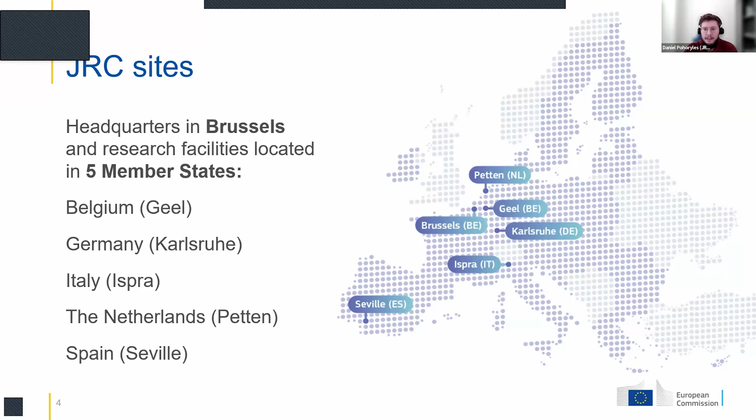The JRC has multiple sites. We are in ISPRA, which is the site in Italy. The headquarters are in Brussels, as for most of the European Commission. We also have other sites in Petten in the Netherlands, in Geel in Belgium, in Karlsruhe in Germany, and in Seville in Spain. At our site in ISPRA, we are home to the European Laboratory for Structural Assessment, ELSA.

Our laboratory is actually two different laboratories. It's a research infrastructure used to test safe and secure buildings. On the one hand we have the HOPLab, which is a lab for testing materials under high impact loading. On the other hand, the laboratory I'm going to talk about much more today is the reaction wall, which is a large scale facility in which we can test full scale buildings to earthquake loading.

We provide open access to this JRC infrastructure, so there's a possibility for universities or companies to come and do tests at our laboratory. We also provide training to researchers across Europe, so feel free to inquire when we do our trainings. And we provide transnational access through the Horizon Europe ERIES project - I'll show you an example of one of these projects today. We also have projects that are inside of the JRC, and I'll give some examples of these too.

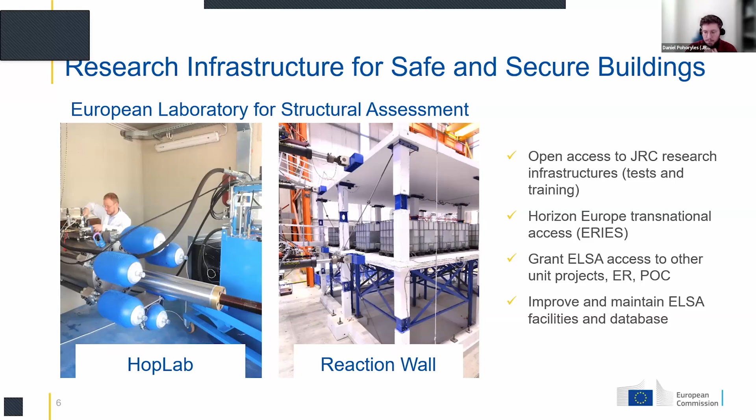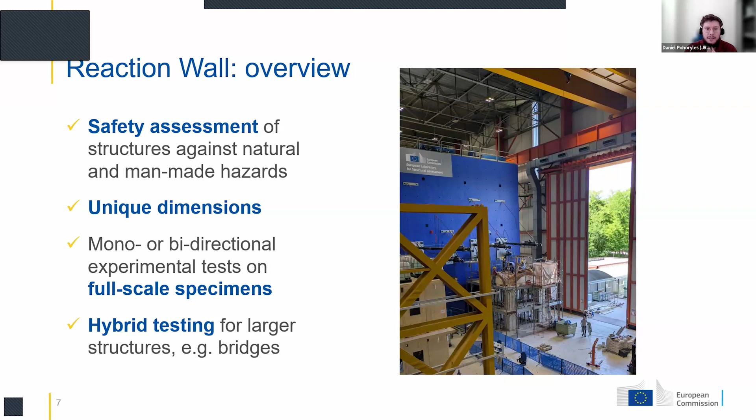Our reaction wall facility, which you can see in this nice picture, is a very specific and special facility in Europe. It's the largest reaction wall facility in Europe, the second largest in the world. We can carry out safety assessment of full-scale buildings. It has unique dimensions - you can see here on the technical side, it's a 16-meter tall strong wall together with a 4.2 meter deep strong floor.

We have capacity to test on two sides of the wall, so we can carry out experiments on multiple buildings in the same time frame. We can carry out seismic testing in one direction or in two directions, and we can also carry out hybrid testing for larger structures.

For example, when there are bridges, we can test big elements of a bridge but simulate the rest of it. Also for buildings, we can test a part of a building but simulate the rest through numerical modeling. So we have a lot of expertise on that.

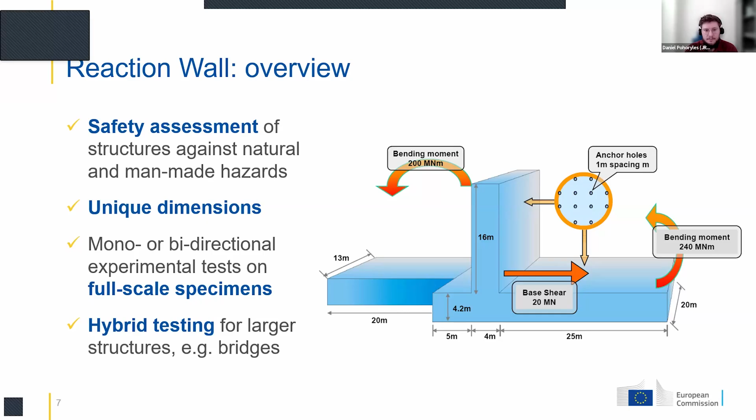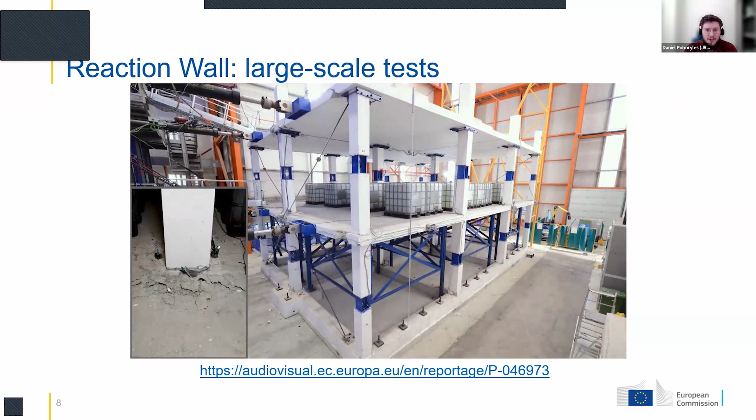Here you can see a bit of our lab in action. When a test starts, we have to first move the building inside the lab into the right position. And here you see an accelerated test. Our hybrid testing, or pseudodynamic testing as it's called, is actually a slowed down version of an earthquake. We can reproduce the dynamic forces through our numerical models and then test it.

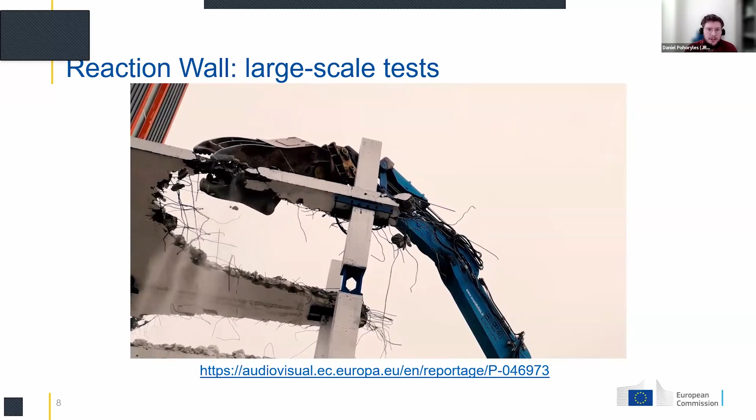And we go through the whole project cycle. At the end, we also demolish the building and look a bit at construction and demolition waste at the end of the project life cycle. So we really look at the whole project life cycle.

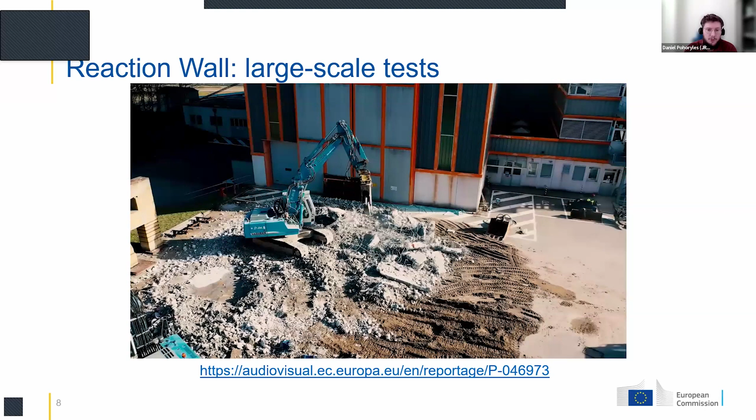We do this because a lot of the pre-normative testing for the Eurocodes, for instance, is done here. A lot of the research that goes into construction and demolition waste regulations is done here. So we really try to influence policymaking through our scientific results.

Now to get to the more pressing topic of the presentation, combined and integrated retrofitting technologies. I'm going to start with a brief introduction of the motivation and background. I'm sure most of you are familiar with this already if you're following this series of lectures.

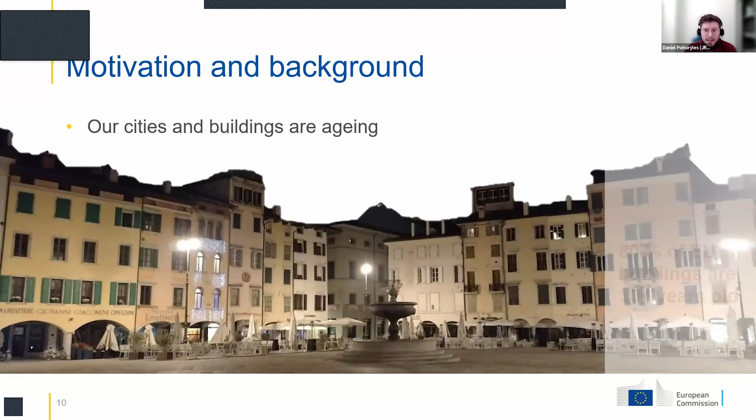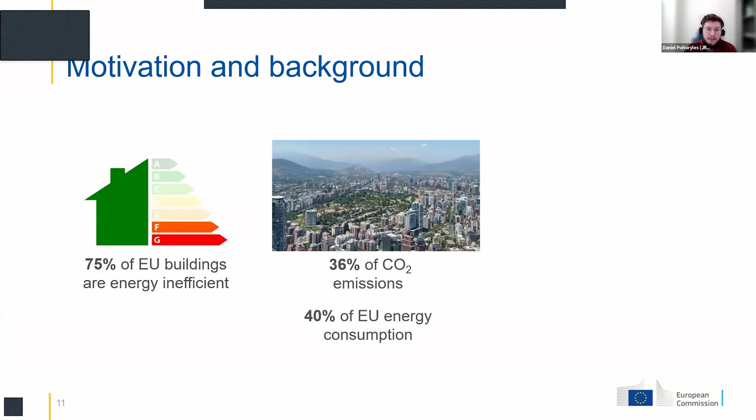As we all know, our cities and buildings in Europe are aging, and about 80% of the EU building stock is over 30 years old. This means that many of our buildings, about three-quarters, are deemed energy inefficient. The construction and building sector is responsible for a large proportion of CO2 emissions and up to 40% of EU energy consumption.

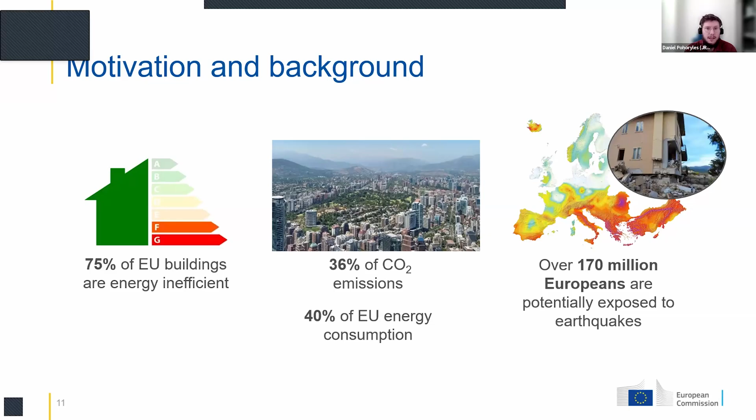At the same time, over 170 million Europeans are potentially exposed to earthquake hazard, which very often has catastrophic consequences if the buildings are not adequately designed or retrofitted.

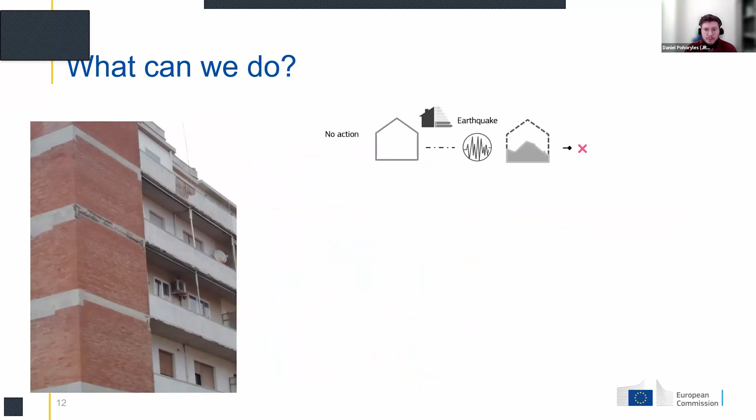So what we can do for these buildings is either take no action, which obviously leads to bad energy performance and potential losses during an earthquake. Or we can, as has been done a lot recently, focus on the energy side and do energy renovation. However, if you're in an earthquake-prone zone, this alone will not help, and you will actually lose the investment you made into the energy renovation.

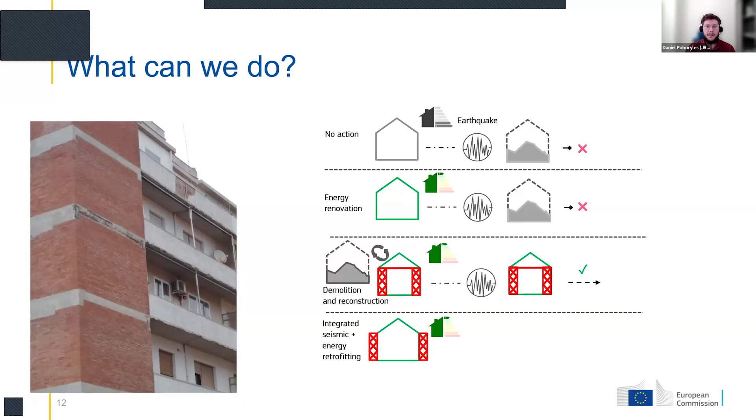So instead we are trying to promote actions that ensure the building is safe and energy efficient at the same time. This can be done either through demolition and reconstruction of a new building to the highest standards, which gives good energy efficiency and safety and may be more sustainable from a life cycle analysis perspective, or through integrated seismic and energy retrofitting, ensuring good energy efficiency and that the building withstands earthquakes in the zone.

So what we did at the JRC, within the pilot project we built a few years ago, is a multi-criteria assessment of combined retrofitting options. The idea of combined retrofitting is to ensure sustainability and seismic safety.

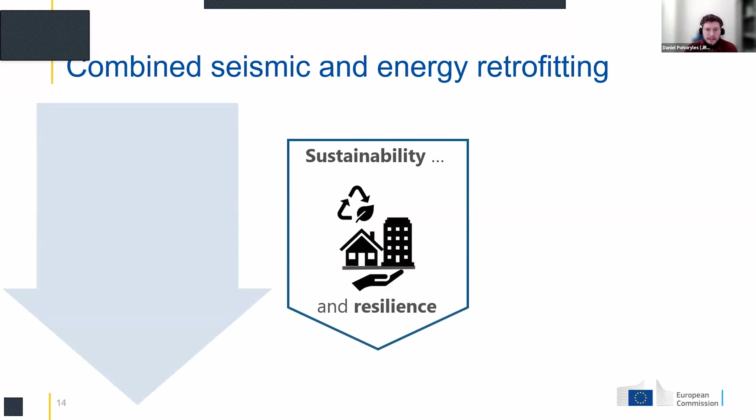And resilience as such. But we tried to cut it out into 6 different criteria that we used for assessment. One is the reduction in losses from seismic events. Another is the reduction of impact to the environment. And the reduced labor time of combining the retrofitting compared to carrying out seismic and energy retrofitting separately.

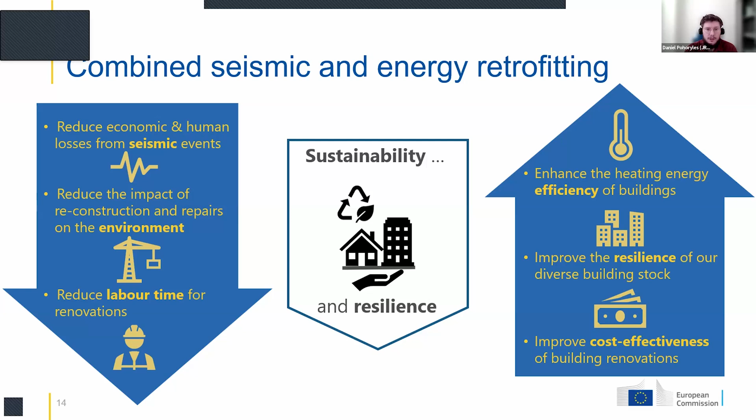We also looked at the enhancement of heating energy efficiency in buildings, the improvement of the resilience of our diverse building stock, and the cost effectiveness of carrying out these two interventions either separately or in an integrated fashion.

We categorized possible combined retrofitting options into four categories, starting from exoskeletons, interventions on the building envelope, replacement of the building envelope, or retrofitting of the roofs and the floors of a building.

I'm going to focus today on envelope interventions because these are things that we actually also tested in our lab. This doesn't mean that the other types of retrofitting options are not equally valid. From our evaluation, envelope interventions proposed so far have a lot of benefits in terms of structural safety, sustainability, and energy efficiency, and they're usually the most cost effective.

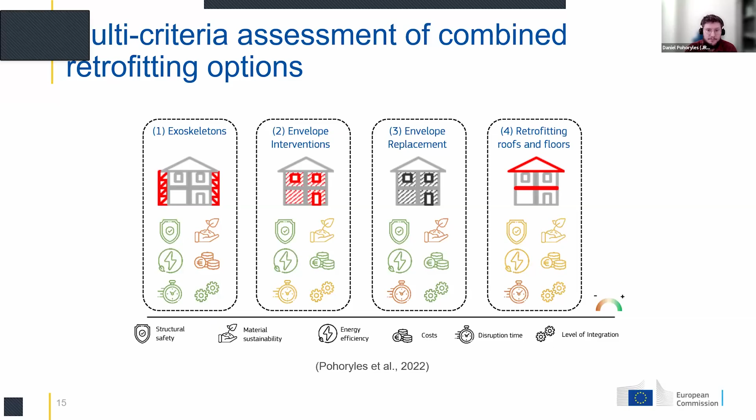So focusing on interventions on existing building envelopes, when you think about a large proportion of the European building stock, you will have especially buildings built between the 1950s and 1980s in Europe. They will be reinforced concrete buildings with masonry infill walls. These infill walls do contribute to the strength and stiffness of a reinforced concrete building.

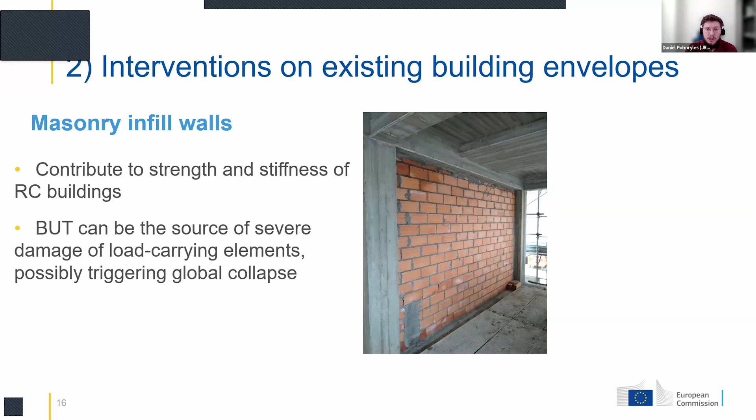However, they can also be the source of severe damage to the load-carrying elements, because usually they are not actually considered in the design of the building. This can cause global collapse or local collapse. You have some images here from the L'Aquila earthquake showing pancake failures or failures of the envelope.

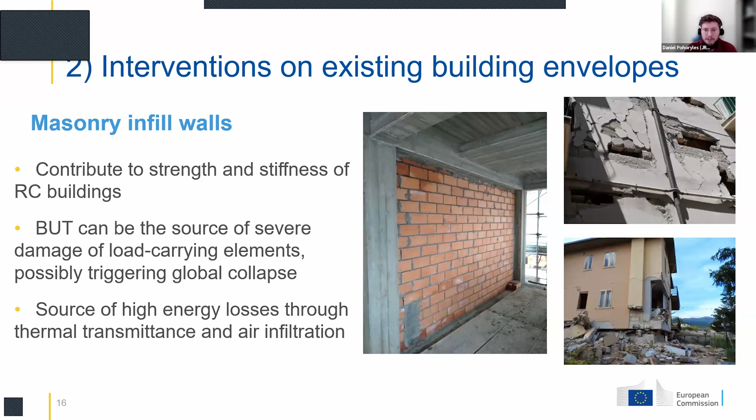At the same time, from the energy perspective, they're also responsible for a lot of the energy losses through thermal transmittance and air infiltration through the wall, because typically in the 50s or 60s especially, there was no thermal insulation placed on these walls.

Here are some examples of interventions that can be done for existing building envelopes that have been proposed in the scientific literature. I will talk about some of these cases more specifically when I discuss the JRC projects. There's a possibility, for example, to combine textile reinforced mortars with thermal insulation.

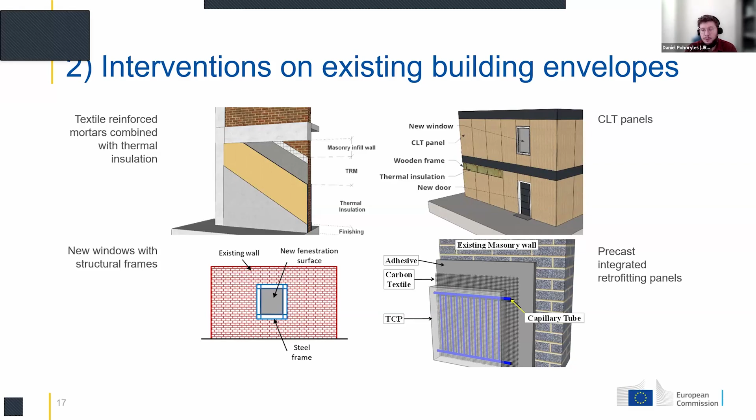You can use CLT panels as a retrofitting option. You can also look only at the windows and apply a new fenestration surface, and at the same time apply a steel frame around the window to strengthen the walls. Or you can look at different precast solutions, precast integrated retrofitting panels. There have been a lot of proposals lately on this topic.

The benefits of these interventions is that they can be really applicable to many types of buildings. Whether you look at infilled reinforced concrete buildings, masonry buildings, or steel buildings with infills, they're usually not so invasive to the building because you just need to modify, let's say, the outer envelope or sometimes also the inner one.

The relocation of residents might not even be needed because you can work from the outside, and the business downtime is also low if the intervention is done only from the outside. On the other hand, if you look at prefabricated or modular elements, you can also carry out these interventions in a much faster way than if you look at exoskeletons or things like that.

The issue in some cases, though, is that it modifies the appearance of a building facade. This might be something you actually want if you want to do also an architectural upgrade of the building, but in some cases it's not possible. If you're looking at the historical center of a European city, very often it's not possible to completely modify the appearance of the building facade, so you need to rethink how you can do such an intervention.

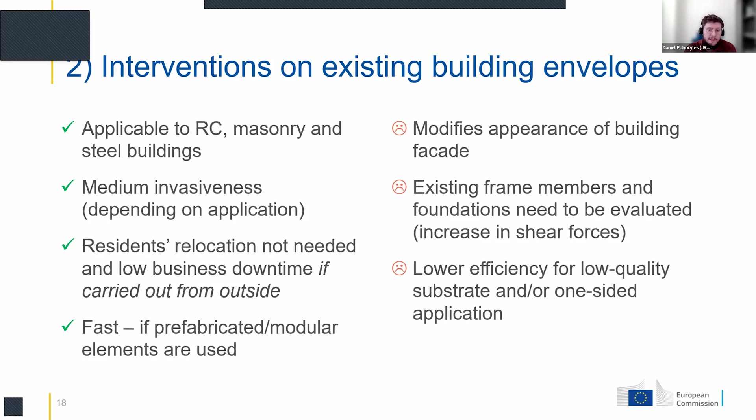You also need to look at foundations and existing frame members, because maybe you improve the envelope, but then you increase the shear forces that the building has to sustain, which maybe the reinforced concrete frame cannot sustain. And if you're looking at low quality substrate or one-sided applications, the efficiency of these interventions might not be so high.

So I'm going to focus now a bit on some experimental tests that we carried out at the JRC on these specific integrated retrofitting solutions on the building envelope. One of the first projects we did on this topic was the project iResist Plus, innovative seismic plus energy retrofitting of the existing building stock.

The idea of it is to combine thermal insulation with textile reinforced mortar. So you see here the textile being applied in this little video. This could be, in our case, a basalt textile, but it could also be glass or carbon textile. Then you apply some mortar on it, with the thermal insulation inside of this reinforcement.

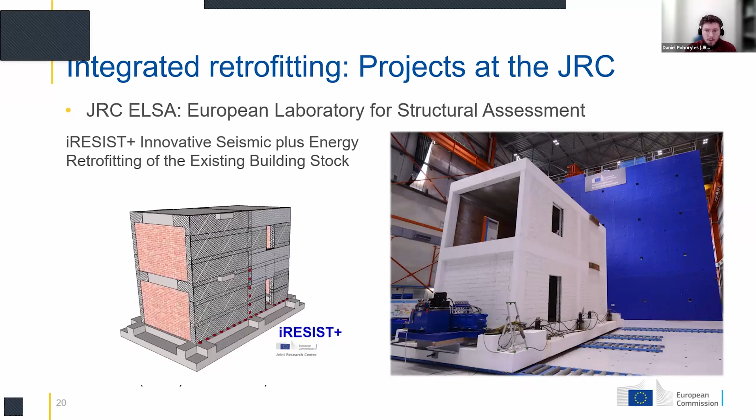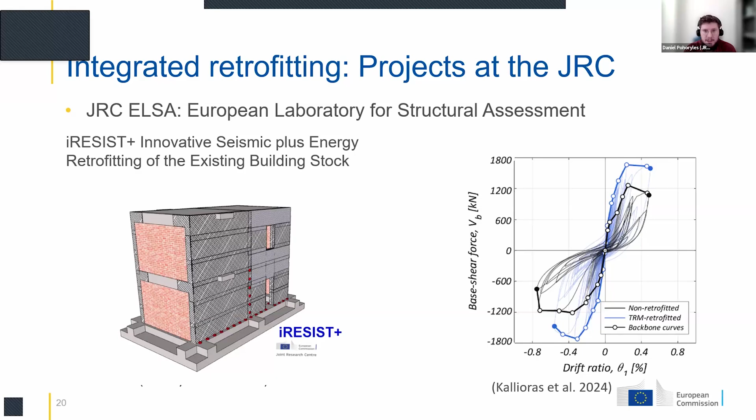When we tested this on a full-scale building in our laboratory, we found that with this TRM plus thermal insulation retrofit, you can get a large improvement in capacity and stiffness. We tested the same building with pseudodynamic testing to earthquakes, so we don't just look at the envelope curve but also at the same earthquake response. The building that was not retrofitted could only sustain an earthquake about a third the intensity of the one tested with textile reinforced mortar plus thermal insulation.

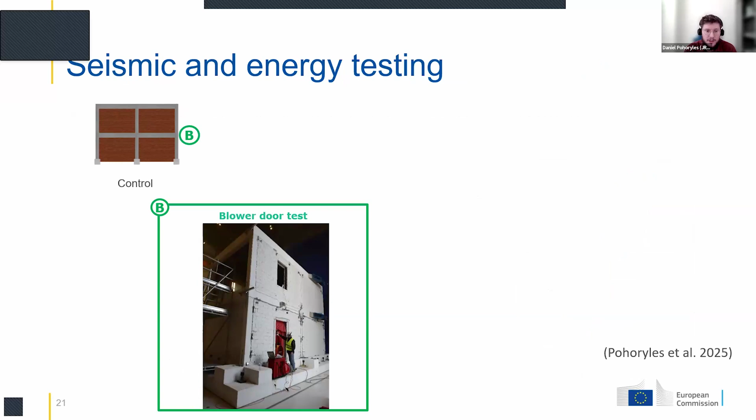We also tested the energy performance of the building using blower door tests, which measure how much air infiltration happens at different levels of damage or cracking. We first tested it at low damage with the seismic testing, then repeated the blower door test at medium and high damage. We didn't continue after that because we had gaps and damage that would require completely rebuilding the masonry infills.

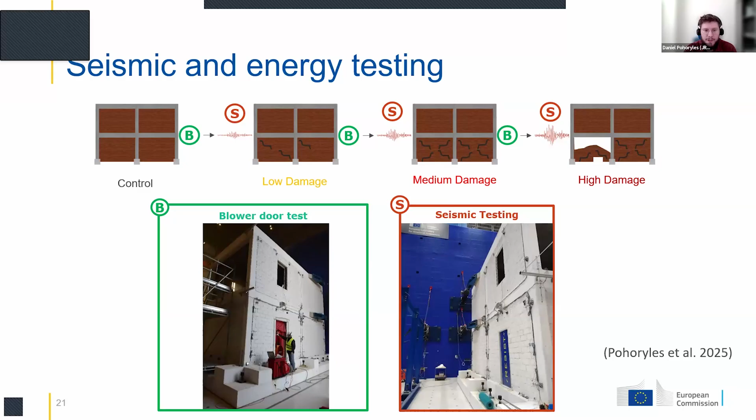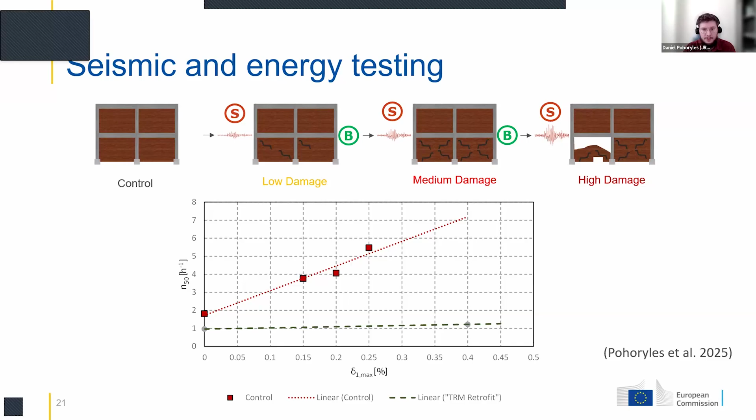Of course, at high damage this doesn't matter much because you have to rebuild the walls anyway. But at low damage, you might have cracks you don't actually repair. So around 0.15% drift, you might not need structural repair, but you'd have increased air infiltration and increased energy demand afterwards. We published a study recently looking at the effect on heating energy demand, and the effect is very large.

We've done other tests on precast panels with a similar idea, using carbon textile reinforced mortar, but instead of standard thermal insulation, we use a capillary tube system. This is similar to what you might see in modern houses with underfloor heating, small tubes through which hot or cold water passes to heat or cool floors. These have also been proposed for walls.

In our case, we try to use them together with the textile reinforced mortar in a precast panel that can be modular, so you can attach different panels to each other to heat or cool the walls, while also providing additional stiffness and strength with the carbon textile. We did this in collaboration with COSIT, a construction engineering research institute in Korea.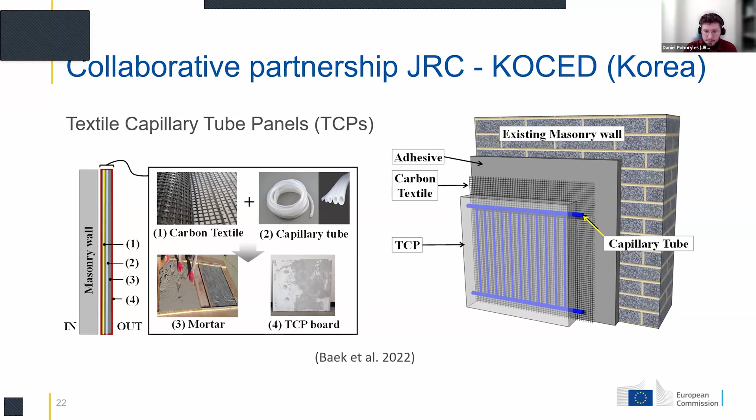We first did tests on individual frames, comparing our retrofitting system with basalt TRM and thermal insulation against the retrofitting system with precast panels. Looking at the cyclic response, pushing and pulling these frames laterally, we found that you can achieve essentially the same response whether using textile reinforced mortar or these precast panels. So this was a proof of concept.

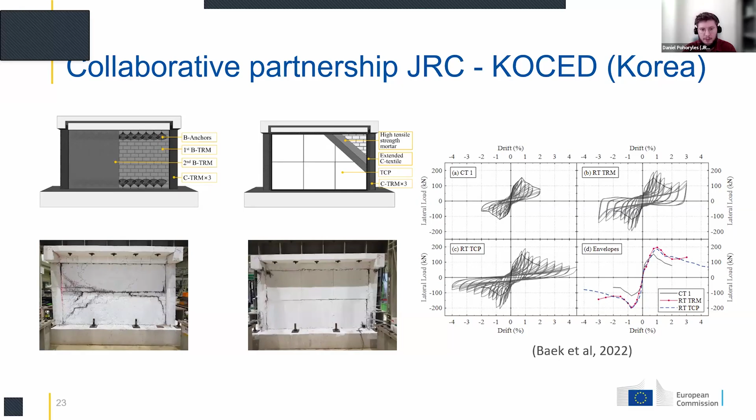But more interestingly, we then went to the building scale. We tested buildings with a similar geometry to the one tested at ELSA, but this time on a shaking table in Korea.

Due to the shaking table dimensions, we could only test the building in one, let's say, a 1x1 frame instead of the 1x2 frame that we had in our lab. But the general dimensions are quite similar.

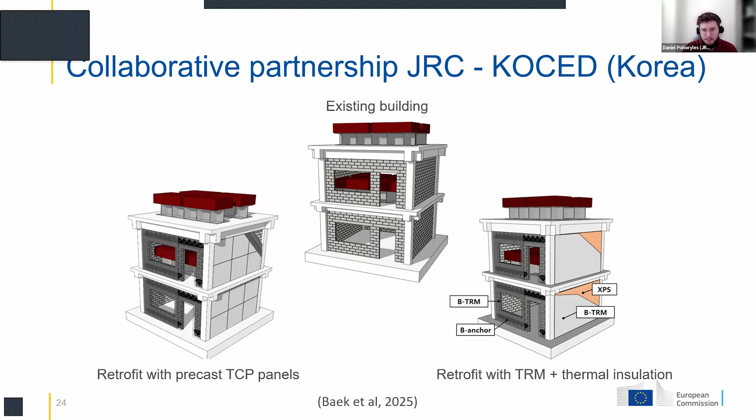We tested it with the retrofit with the precast panels on the left and the retrofit with the TRM plus thermal insulation. I'll show you now a video of the tests, the final test of each of these buildings at 150% of the design earthquake with a PGA of 0.72 G.

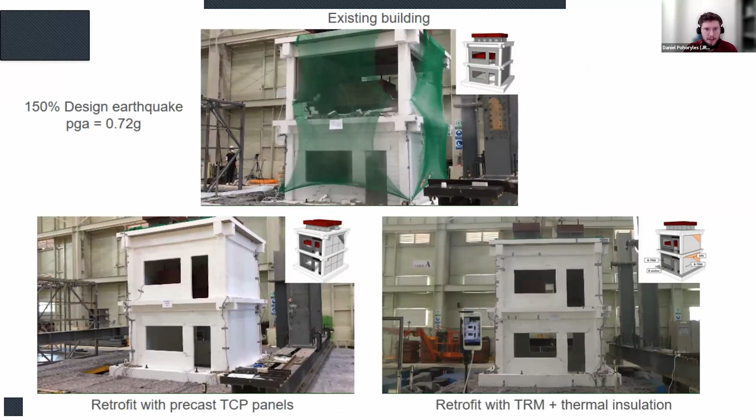You can see the existing building, non-retrofitted, has full collapse of the masonry infill walls, while the two retrofitted buildings have much lower intensity of floor acceleration. The building responds in a much stiffer way, and you have absolutely no damage at the end when you look at the building.

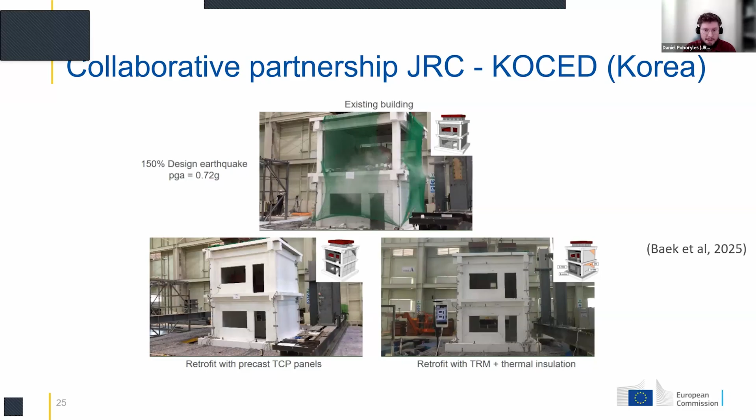So these envelope retrofitting systems have been evaluated now in our lab at the reaction wall facility, but also in the shaking table facility in Korea, in this collaborative partnership between JRC and KOCED. KOCED has also done some evaluations of the thermal performance - I don't have any images on that, but the thermal performance of the buildings has significantly improved.

So now I might move a bit away from the combined retrofitting, and look at some seismic retrofitting activities that we are currently carrying out at our laboratory. As I mentioned before, our laboratory has internal projects. The project I've shown you so far, the iRESIST+ project, is a JRC internal project, with the aim of exploring these new technologies and seeing how they can perform in an anticipatory way.

So to see really how this can influence policymaking in the future. And we have actually had some impact as well in making sure that future renovation policies also include the idea of combined and integrated renovating, and not just having the energy renovation alone.

But we also carry out activities that are in the framework of Horizon Europe, and more specifically the ERIES project - the Engineering Research Infrastructures for European Synergies project. There are multiple laboratories across Europe participating in this project. The current ERIES project lasts until next year, and we have already carried out quite a lot of testing of different buildings within this framework.

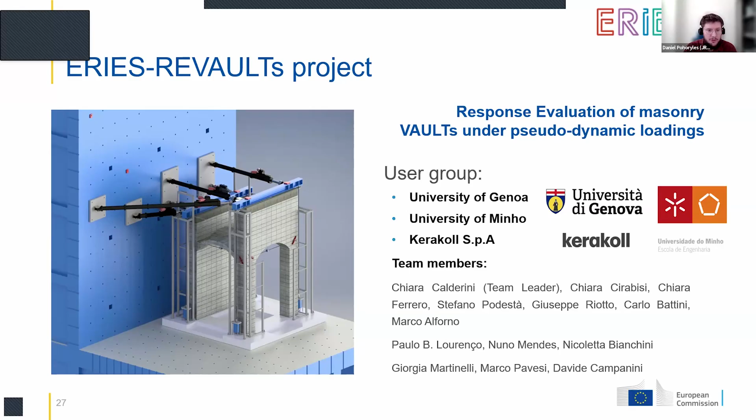In our lab, as we can carry out hybrid testing where we simulate the full structure but only test a part of it, what we did is extract this vault with the correct boundary conditions. So you have the internal wall on this side and the external wall on the other side, which are built from stone masonry. The vault in the middle, which is the most interesting part, is a brick masonry cross vault. And at the top, we can apply the loading, the seismic loading, according to the specifications of the user.

So it's really a very large and full scale part of the structure. And we have some tie rods, as you would have probably in a church nowadays that has been already retrofitted maybe some decades ago. And this represents the current structure.

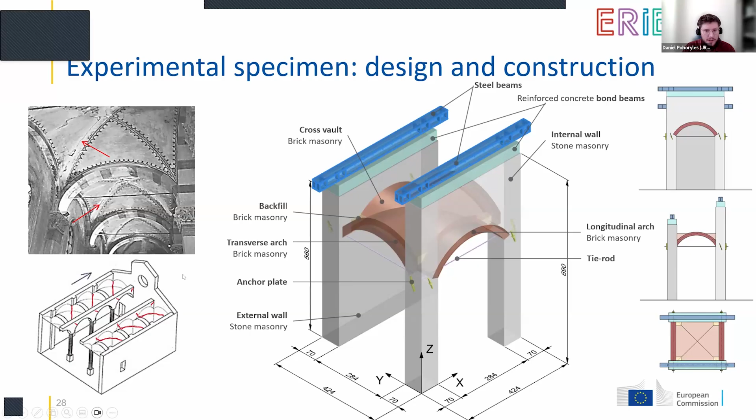Here you see some examples of seismic damage on this kind of structure. As you see, most of the cracking would happen along the diagonal of the vaults, and that's something we want to simulate in our earthquake testing.

Here you can see the construction of the specimen. This specimen was built from stone masonry, so sedimentary limestone was used for building the walls and the columns, and then bricks to build the vaults. We had to actually construct the specimen inside of the laboratory.

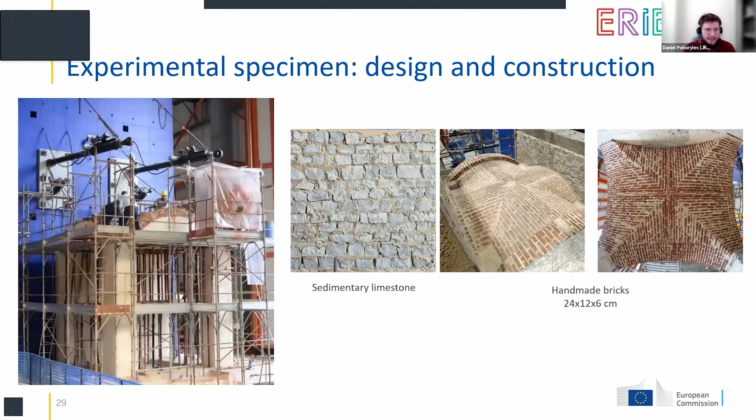At the beginning, I showed you a video of a building being moved inside of the lab. Usually we build the building outside and then move it inside. But this building, as it would probably collapse by moving it inside of the lab, had to actually be built inside of our laboratory.

So you can see the work of the stone masons, and now the work of the masons to build the vault. Obviously accelerated here, this took maybe around a month and a half to complete the full construction.

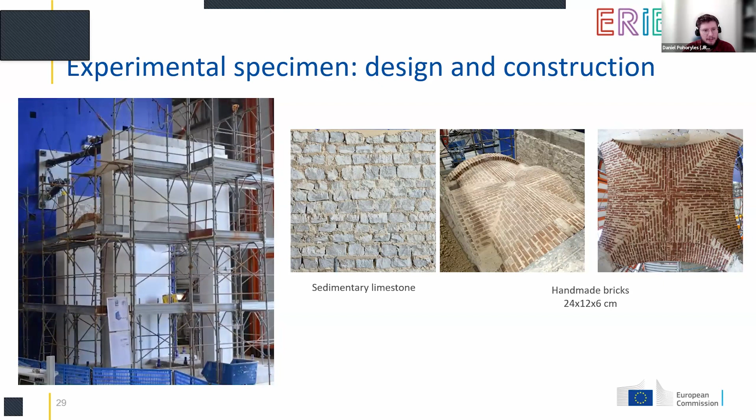There was some plastering applied on top, so now you don't see the nice stone masonry anymore. And this is the final view of the building now.

Currently, we applied a speckled pattern. So the same building is now in the lab with a lot of little black dots, because we want to use digital image correlation. We use 2 cameras in stereo vision in order to have full information about the 3D movements of every single point of the vault and every single point of the wall.

The idea of these kind of tests that we carry out in our lab is really to collect as much data as possible, to publish this data in an open access way afterwards, so that it can be used for improving construction, improving numerical modeling, improving future testing. So when we have a test like this, we try to get as much data and information as possible.

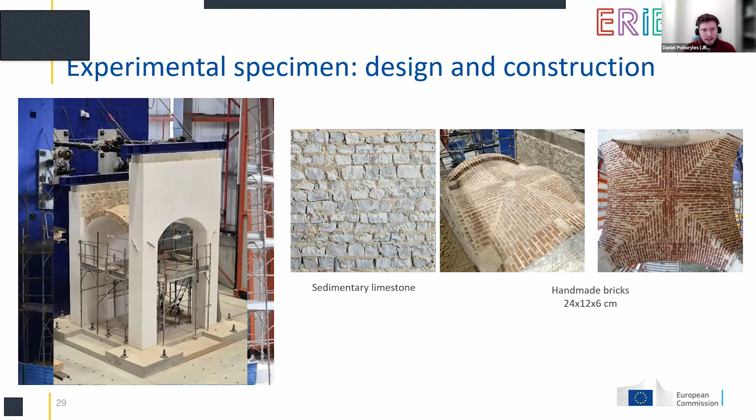Why I'm presenting this right now when I talk about retrofitting is that there are actually 2 phases of testing. So the current vault is going to be tested now in the next weeks and next month in the unstrengthened configuration. So the building as it is, or the part of the church as it is, will be tested up to moderate damage.

We will test it on the one hand with some cyclic testing, but on the other hand also with some pseudodynamic or hybrid seismic testing, where we want to go up to a level of damage that is still easily repairable. So we don't want to have the risk of the vault being too damaged.

Then in a second phase, early next year, we will have the company coming in and renovating, or in this case, actually repairing and retrofitting the vault with steel reinforced grout, SRG.

You can see some examples on previous tests that they did on a smaller scale. So you have, similar to the textile reinforced mortar, but in this case, a sheet made from steel fibers that is being applied on top of some mortar, and then you have a second layer of mortar applied on top of it.

This will be a mortar that obviously is also compatible with the kind of masonry substrate that the vault is made from. So the whole testing will then be resumed.

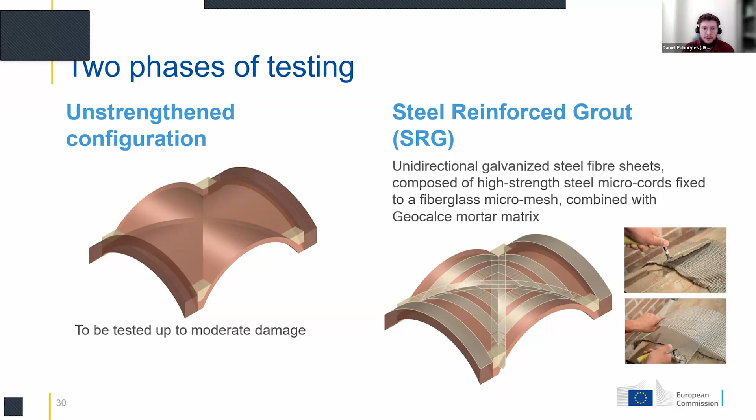So this is a typical kind of retrofitting test that we do in our lab, that we test first the non-retrofitted and then the retrofitted building.

So I come now to the general conclusions of my talk. As I showed you at the beginning, our building stock is aging, and a large part of Europe's building stock is in need of seismic and energy retrofitting.

In our pilot project, we built an assessment of all possible combined and integrated seismic and energy retrofitting techniques that have been tested so far by scientists or companies. There's, of course, hopefully room for development of future technologies.

We have categorized them into 4 main types: exoskeletons, interventions on the existing envelope, replacement of the existing envelope, and interventions on the horizontal elements. I have focused my talk on the interventions on the existing envelopes, with some examples of testing at ELSA and testing in Korea in combination with KOCED.

In general, what we found is that further development and experimental research is still required, because many of the assessed technologies are actually still in a conceptual stage or tested at a small scale. There's really a need for more validation, testing, and experimental data.

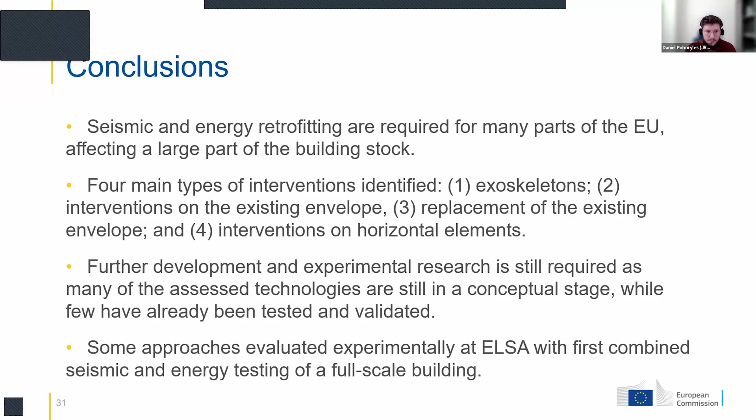You will find a lot of information in relevant reports from the JRC or in our journal articles. On the left hand, these 2 yellow reports - but there's a whole series of other reports within the same project, the pilot project REEBUILD, on integrated techniques for the seismic strengthening and energy efficiency of existing buildings.

If you search for REEBUILD with the 2 E's online, you will also find our website, where there's a lot of the data that we have used for carrying out assessments on the EU scale. So we have had a look at seismic risk and energy efficiency on the EU scale, and we have made an online tool available to everybody. If you go to the REEBUILD website, you find that.

You can also find the JRC technical report on the iRESIST+ project - that's a project on the testing of a typical masonry infilled reinforced concrete building in our laboratory with thermal insulation and textile reinforced mortars. You find some numerical simulation and impact assessment in this report, but there's also been recently published some journal articles about the test results with this technology, and with some other technologies tested.

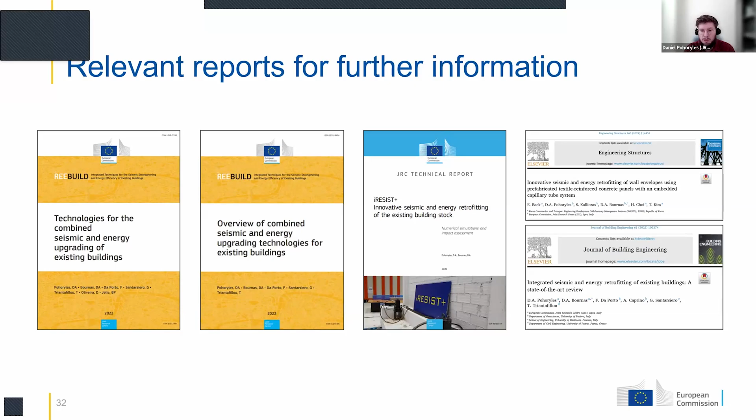And similarly, the tests that we have carried out together with our Korean colleagues have been published in journal articles in Engineering Structures. So if you want to find out more, please have a look at these articles. I provided a list of references here.

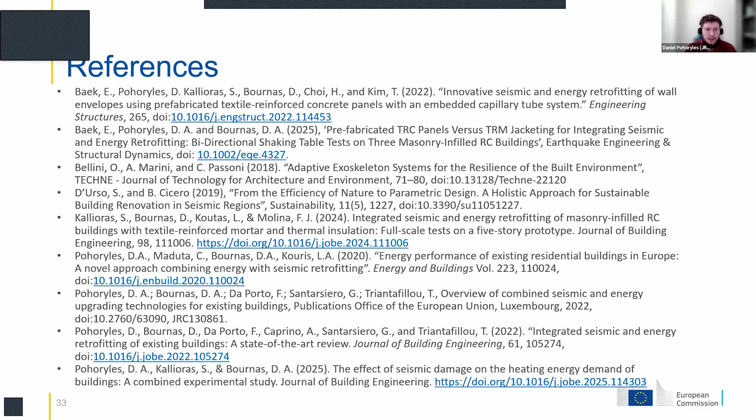So if I understood correctly, you will have access to the PDF of these slides, so you can have a look at the references in more detail if you're curious about it. And with that, I would like to thank you and give you also the opportunity for some questions, hopefully, and remarks. I open the floor for questions and remarks.

Thank you for the excellent presentation. There are 2 compliments in the chat. Just a moment, if you can read - multi-criteria decision-making study. It is one question, I think: are the outcomes of a multi-criteria... Can you see it? Yes. Are the outcomes of a multi-criteria...

Okay, well, that's a very pertinent question, actually, because obviously what we tried is to create a framework rather than look at individual projects. We wanted to build a framework in which we can do this multi-criteria decision-making process. So we have done this first for residential buildings, and I showed you one slide with some visuals about which are, let's say, more sustainable or more energy efficient, but we actually also have a full report on that.